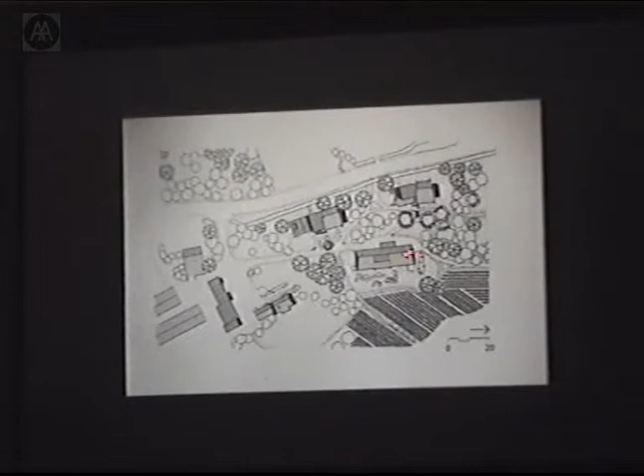This is the site-section relationship. Talavana is this one. There is an agricultural field that we saw an image of earlier that goes towards the Baltic Sea. And as you can see, a very different disposition behind the building in terms of its closeness to this rather steep hillside. This is another dormitory up here in that complex.

Anapestin is its name. And when Asmussen first began designing for this community, they were requested and required by the local commune to put together a master plan. The dilemma was, of course, they didn't know if the college would grow, they didn't know what initiatives would proceed. You might say there wasn't a programmatic direction for it, there was just a dream and a vision, but they had to have a master plan that might cover all possibilities.

And as they were developing the master plan, they made some decisions early on about what were the basic sites. If one was going to build in this landscape, there were some natural sites, some places that should be left alone, some places where building would be appropriate and would harmonize. And so on that basis, they began locating buildings according to the natural disposition of places.

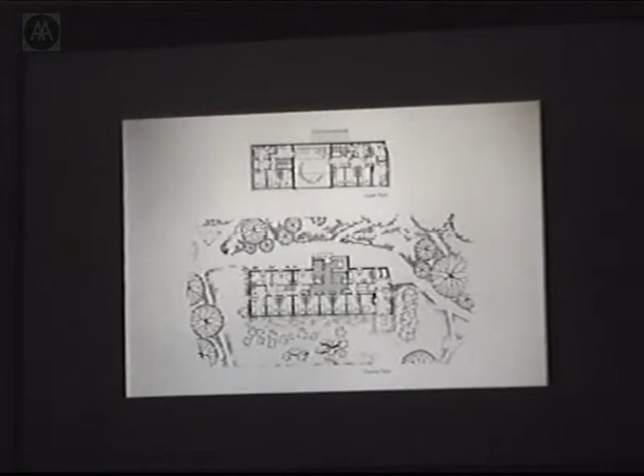I'm going to take a walk now along this path towards this building, towards that inflected edge. You can see again the way in which gardens for use are woven together with pathways for people, characteristic of this community. And we come upon the building.

We see its east-facing facade at an oblique angle, and we come up to this portion of the building. I think it doesn't take a great deal of imagination to see this facade, as indeed it's intended to be by the etymology of the word, as a face with a kind of eye peeking out the roof, which on the other side, where the path doesn't have this relationship, continues straight across and follows a kind of architectonic logic. In this case, there's a window that serves as a kind of eye, a doorway that one might mistake as a mouth, but certainly there's a facial gesture approaching, speaking to the path of approach.

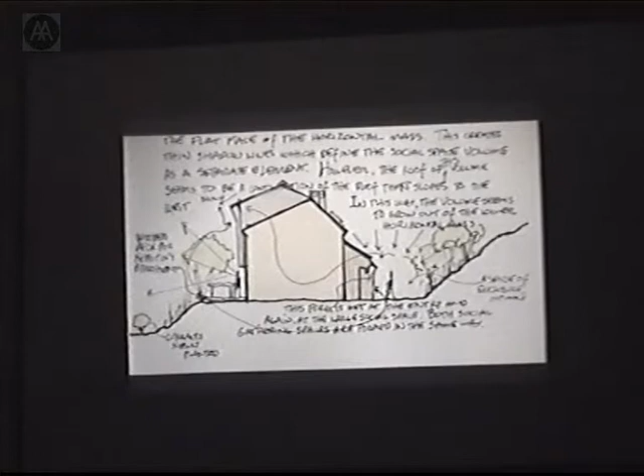And the building inflecting, in other words, the path literally pushes into the mass there and bends around it. This relationship, again, is a fairly typical one. On this side of the building, the west side, the building in its configuration, in its geometry, mirrors the landscape that one finds over here, and itself stitches together, you might say, with that landscape to create a space that is made in part of nature and part of the building.

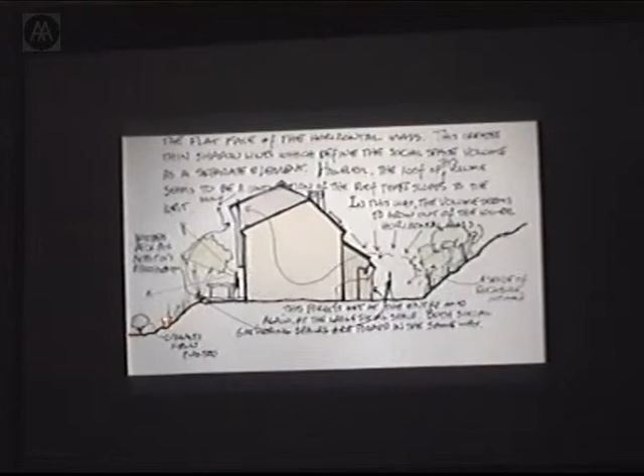On the other side, facing the Baltic, in which there are very orderly agricultural fields, as we saw in an earlier image, the building is more vertical, more regular, perhaps even echoing the furrowed pattern of rows of vegetables.

We can see, again, here is the western portion and the eastern portion. The western portion, the other side, has stucco, and even here the rhythm of regular vertical lines is reinforced by a choice of rough sawn timber.

And then the two elevations drawings that Susanne made for the book, I think, reveal the more random quality, the way in which boulders, rocks, trees, shrubs, etc. on the sloping hillside are clustered, and then the character of this facade, again, echoing the landscape toward which it points.

In other buildings, clearly they speak to a very specific spot in the landscape. This is a building called Almandinen, the public function of which is a music room, the private function of which in this plan, as we see the first level, are housing units. And in this plan one can see the naturally occurring rocks here and here, and the building literally completes that circle of rocks to create a private backyard garden and a front entry space off of the main path.

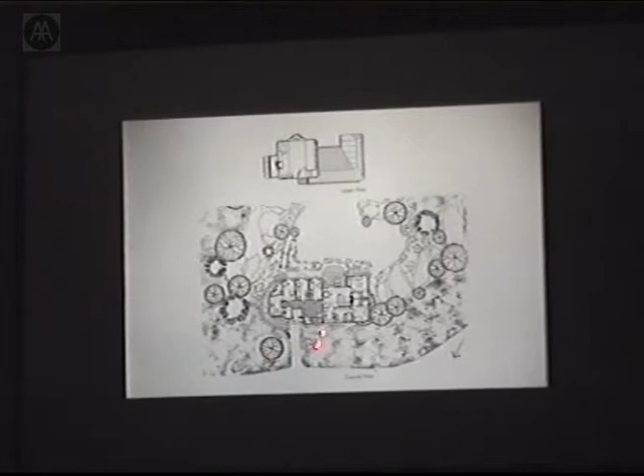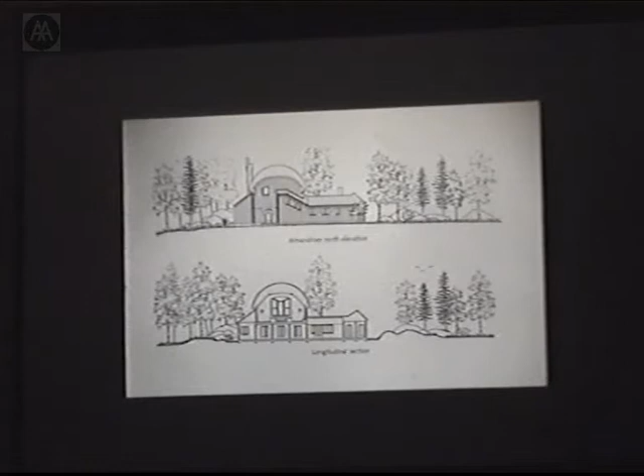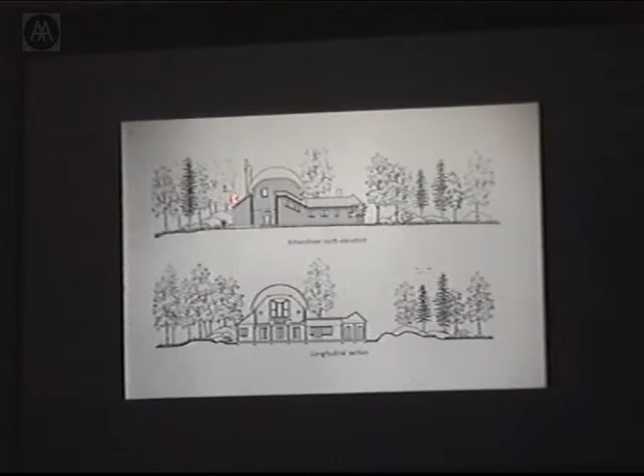There are a lot of things going on with any given building of Asmussen's. We're just focusing on building landscape relationships now, not the other dialectical plays of polygon geometries and circular geometries, curves and straight angles, and other things happening in this. But one, I think, can also see that there is a certain form relationship with that domical, almost head-like element in its placement in that landscape. One senses the building arising out of that conversation in a sympathy with the rocks which it completes.

We see here the site plan of Vidar Clinic, and as was mentioned earlier, the kind of medicine that is practiced here is a little bit different than in a regular hospital. It's clearly anthroposophically oriented and uses many herbs in the treatments, as well as massage and art therapy, eurythmy, music, and so forth.

To me, perhaps this is the most interesting building of them all, maybe the most sophisticated designed by Asmussen in this place, because it exemplifies the overall character that this community had, at least on me, which is that of contemplation, spiritual quality, and again this notion of healing not only at the physical level but also at the spiritual level.

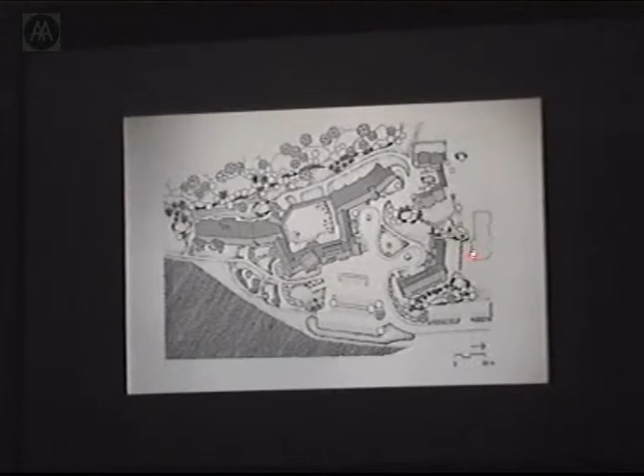The hospital itself is the largest of the 3 buildings, but there is also a housing unit for staff, as well as an outpatient facility and a hotel, a patient hotel, where relatives can stay for a period of time, people who accompany the patients.

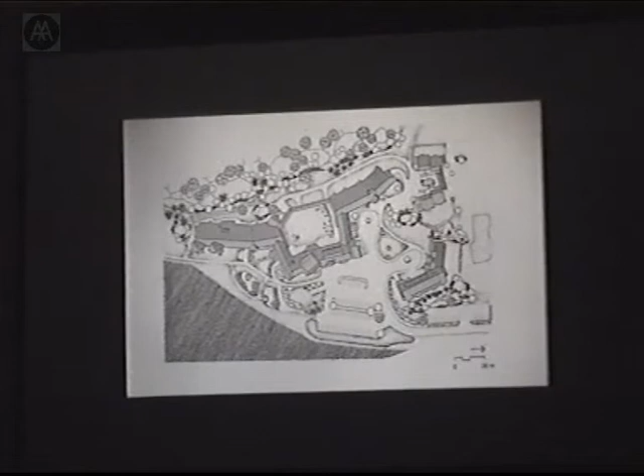Let's see an aerial view of this situation. Again, at the larger level, the hospital relates to the rock outcroppings that are wooded, so it's a kind of wild landscape that grows out of a cultivated landscape surrounding it. Then the housing cluster, as well as the outpatient facility.

What's fascinating here comes back to the issues Gary already talked about: the buildings themselves tend to create space. The hospital itself creates this courtyard space, then the housing is arranged in such a way that it creates a space. Housing and hospital and outpatient facility together create a space.

These spaces are somehow related to naturally occurring situations, such as the big rock outcropping, but also other rocks that sit around the landscape, a major rock outcropping, and then smaller rocks that relate to the buildings, with fences running into them and creating more private spaces.

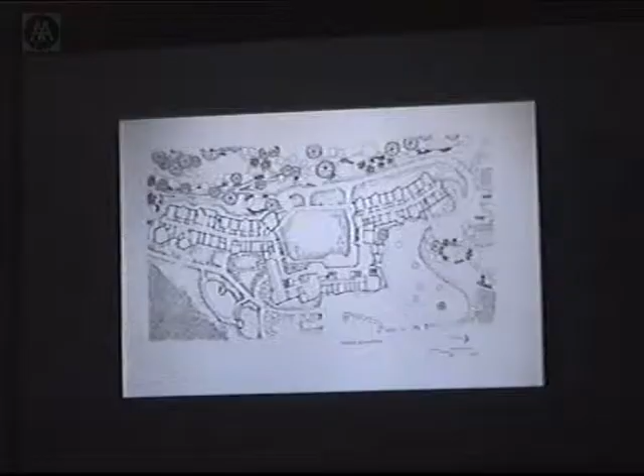We don't really see it here, but we have a better view of how even some individual rocks are responded to by moving the building back. So the rock wasn't taken away, wasn't taken out of the site completely, but is taken advantage of in a way, and it creates a special place.

In contrast to this environment, which gets dark and rather tight — I'll show that in the slides — the other side of the hospital opens to the Baltic, and there are spectacular views across agricultural fields toward the water.

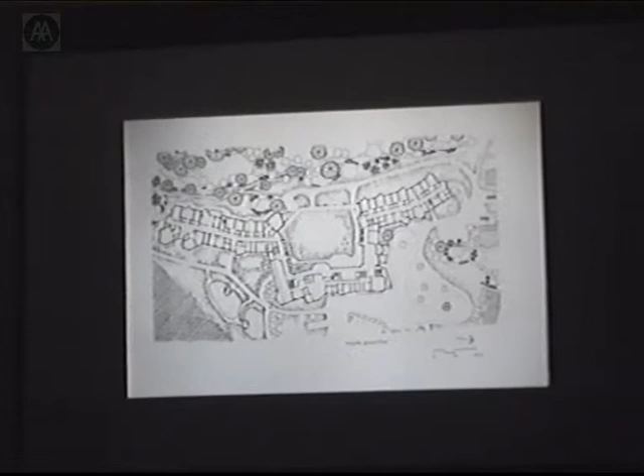Of course, the shape of the roof, the angle and the shape, are directly related to the site, in the sense that this lower angle allows much more sunlight to get back there. The skylight captures the sun that comes from the west and brings it into one of the day rooms, at least on the top floor.

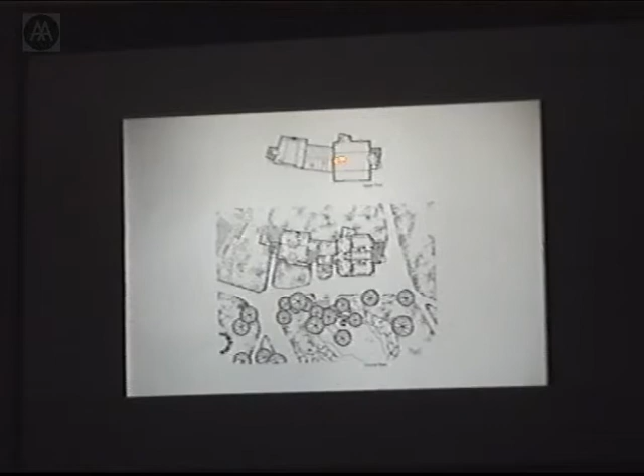Again, this is the eurythmy. I've just mentioned that's the floor plan. And one sees on the outside something of that same form gesture, so one gets a hint of what's going on inside. The large east-facing window clearly tells you where north, south, east, west is located, so each facade in the interior elevation is different, so the dancers can locate themselves.

Give some further examples here from the hospital. Yes, so I will take you back to the hospital to perhaps illustrate in some more detail the effect that the 20 years of programming had on the actual physical structure of the hospital.

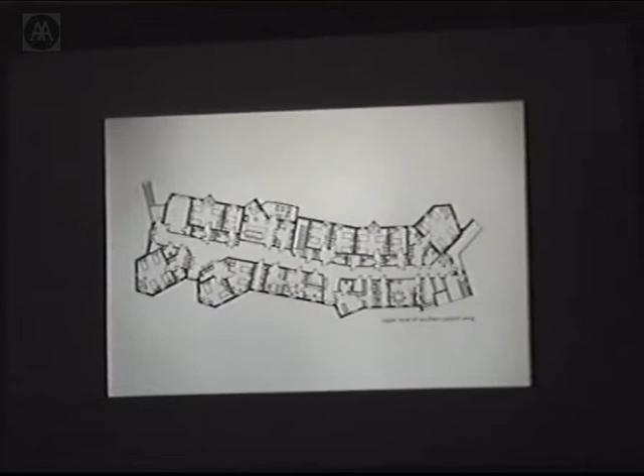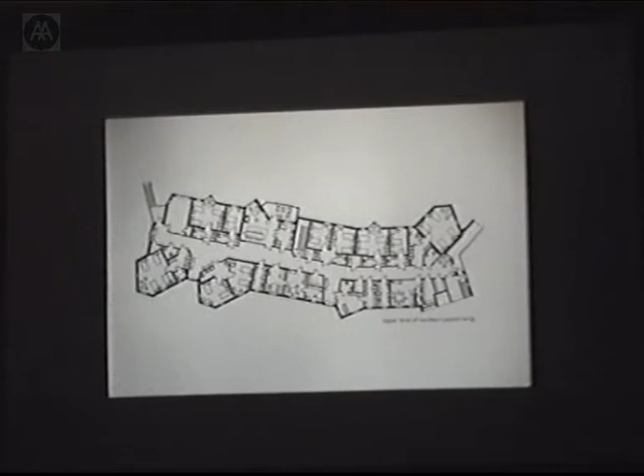And I don't know how familiar some of you are with Steiner's architecture, but certainly the cutting off of angles is seen often as a very typical characteristic. And I know that some architects who've worked in this tradition work with that rather liberally. And what I find fascinating in Asmussen's work is that he does that. He sometimes cuts off angles, but he also uses what we consider maybe more typical geometries. And you see a nice balance between the two. And again, it's not just playing with forms or shapes here, but it rather has medical, or let's say therapeutic reasons.

The rooms that are based on pentagonal geometries tend to be more life-filled, and they often have a higher sense of containment, which comes from the fact that you enter a space and you don't have a wall directly opposite facing you, but rather an angle wider than 90 degrees. So it's much more welcoming and containing, at least potentially, not as confronting.

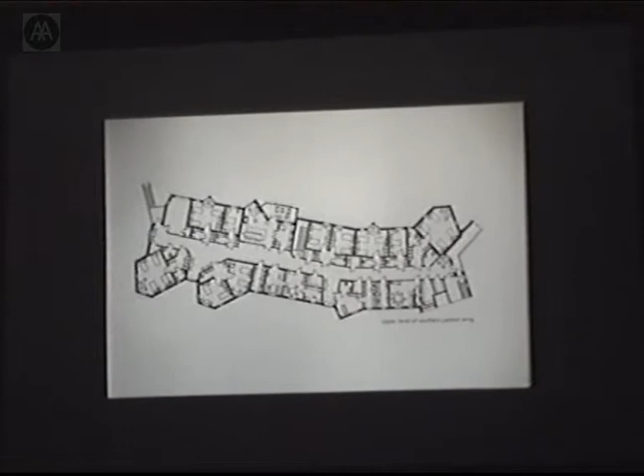On the upper level, rooms are articulated by shaped ceiling planes, which further increases the sense of containment and shelter. Shaped ceilings also provide visual and spatial interest for patients as they lie looking upward from their bed, and there are some patients who are in bed for long periods of time. And Asmussen has been quite aware of that.

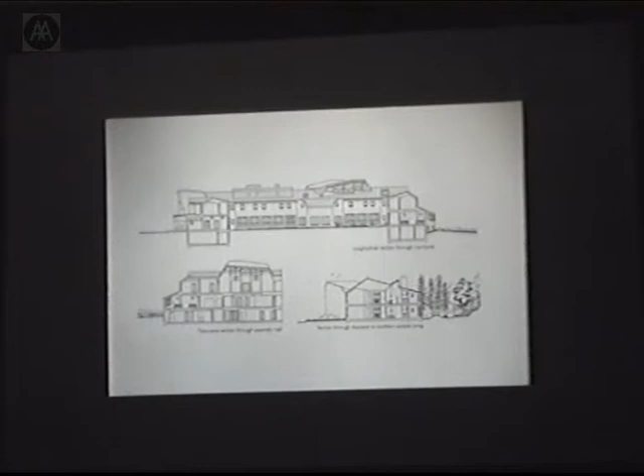Anthroposophic medicine distinguishes between two main types of illnesses: the feverish and inflammatory types, or warm illnesses, such as rheumatoid arthritis, and the degenerative or sclerotic ones, or cold illnesses, such as arteriosclerosis. Depending on the type of illness, doctors often prescribe either warm or cool-colored rooms for their patients.

At the Vidar Clinic, as in all the other buildings, color is never used for merely symbolic or decorative purposes. Rather, it is intended to serve the process of healing by affecting primarily the soul body, soul condition, and to support the function of the spaces in which it is applied.

Occasionally, exterior walls bend outward, creating asymmetrical window bays and alcoves that bring light into the room from two sides. Windows are operable and have deep and shaped reveals. They are designed with great care to allow views from each bed location. The deep sills offer a place for plants and other personal items that the patients might want to bring.

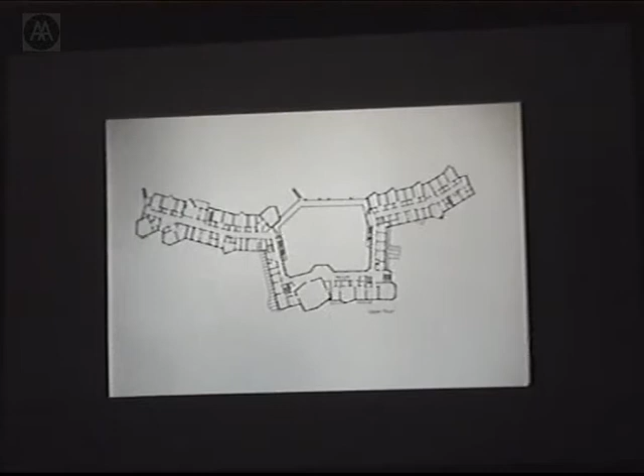And Asmussen has managed to bring light in from the sides in this part, as well as here, where he opens up the corridor into an alcove-like space that allows patients to sit together with family and friends, to make a phone call outside of the path of traffic, and so this particular environment becomes very much more than just a corridor, but it becomes a place to sit, to linger, to meet others, and so forth.

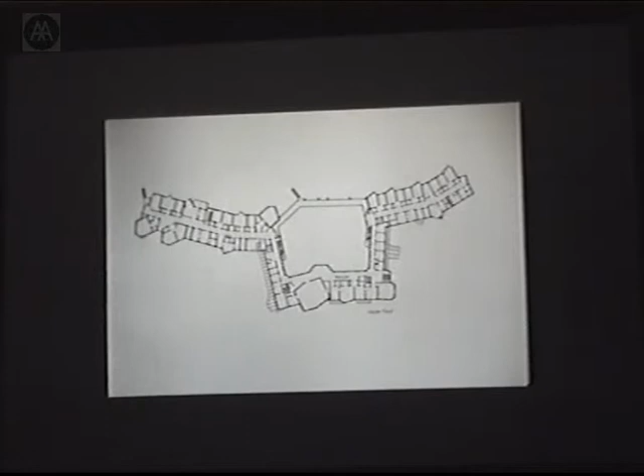In the central core, in opposition also to the corridors in the patient wings, which are double-loaded, in the central core the corridors are single-loaded, with the circulation realm running parallel to the courtyard, so one has always a view out into that space. The upstairs corridor, which you see here, is relatively narrow and has a low-shaped ceiling in some areas, expressing the sense that one is under the roof. So it's clear, again, where one is in relation to the building; it provides orientation.

The gallery completes the corridor on the outside of the building. This two-story space to the west of the courtyard is designed to provide rain and wind-protected sunny outdoor places for patients and others visiting the hospital. Again, ledges and the potential for movable furniture allow each person or group to find the combination of sun, wind, and light that's appropriate for the season and for their condition.

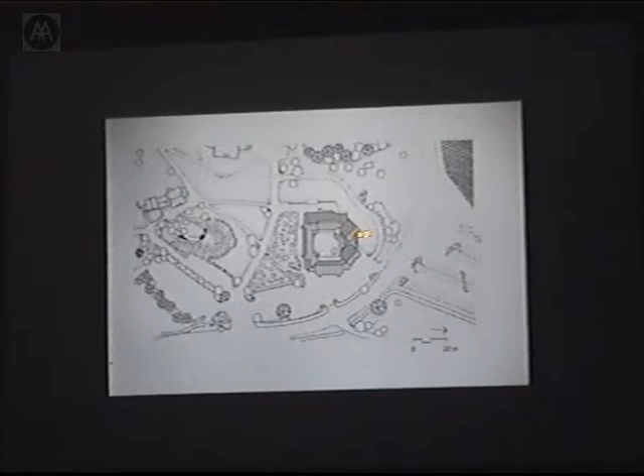I will finish just with a couple more examples and then be open if people have the time for questions and discussion. I'd like to look at another way in which the unity of form and function has guided Asmussen in his design work. This is Robygge, the place with the dining hall, the kitchen, the two eurythmy practice rooms, and an interior courtyard.

This is the plan of that building. One enters through the airlock here and comes into this space, the dining down this way, the administrative offices down this way, the store is here, kitchen facilities and dishwashing, and then an apartment for the cook.

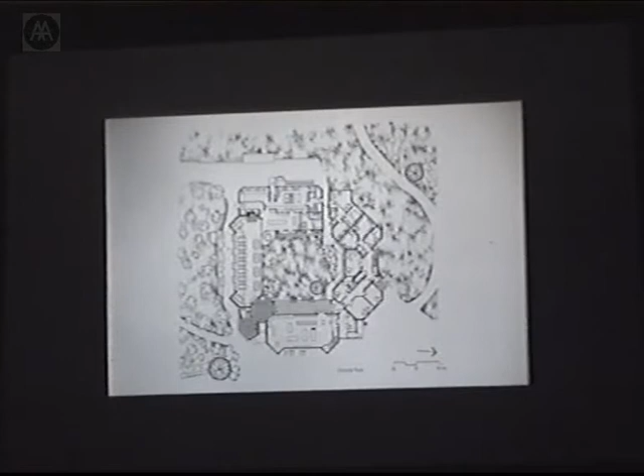So if you lose your job there, I guess you lose your house too. Gives you an incentive to cook in a good way.

And this building, again, through its form, geometries, proportions, etc., is speaking at a number of different levels. What I'd like to call attention to, however, is just the most simple level of the physical and psychological functions and social functions. This is the south edge. This is the dining hall with that artistically expressive fireplace element here, both the chimney and the interior expressing these qualities of its functions. And you'll notice that the center of that space is shifted to the south so that the low winter sun angles can penetrate.

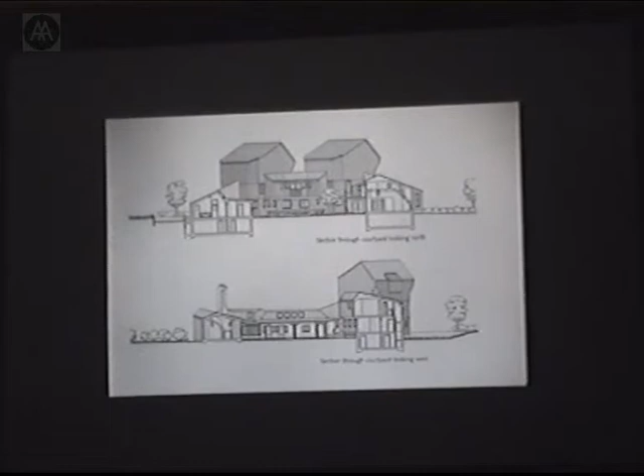It's the lowest segment of the building to allow the sun into that wind-protected interior courtyard, which is used as much as possible throughout the year. To the north, we see the high-volume eurythmy practice room set on top of other more functional administrative spaces. So the overall composition of the building reflects the play of sun, wind, and light, and climate control, the building's function for providing habitable outdoor space.

You can get a sense of that sheltering quality of the building and the way in which this lowest portion is to the south, and also somewhat low to the west and to the east, so light can get in.

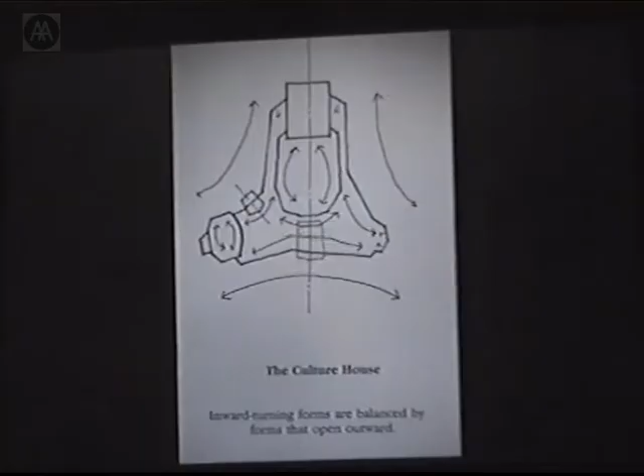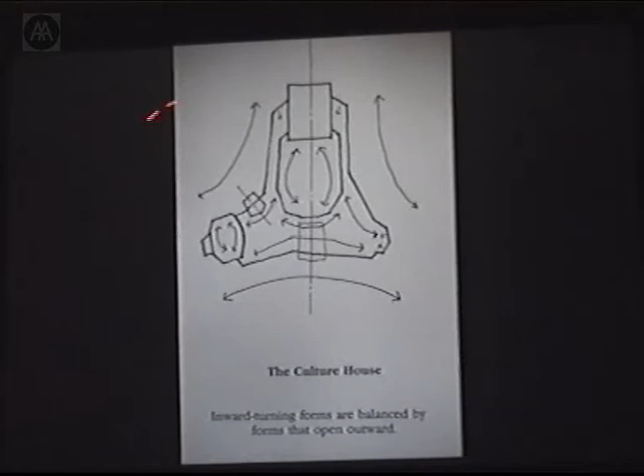The building is composed, one of the principles that I talk about in the book is polarity, and we can see that very much here also, that we have this convex figural element of the auditorium, and then these concave forms that are outward reaching, embracing, and in the spirit of the harmony of site and building are actually shaping and completing spaces in relationship to rock outcroppings and to the rest of the circle of the buildings on the south side around the orchard meadow. And this is embracing the agricultural field, which we saw across the long distance there.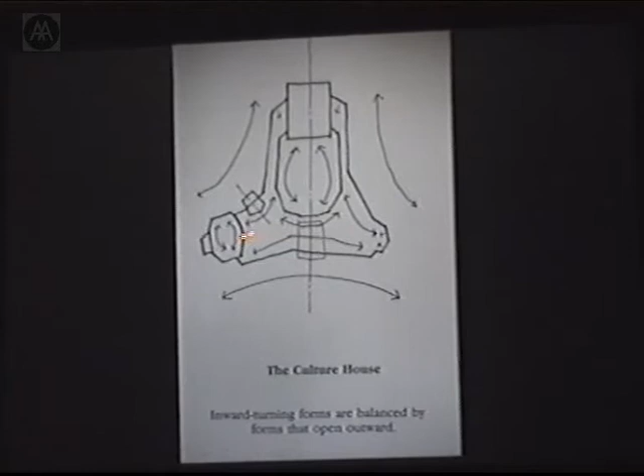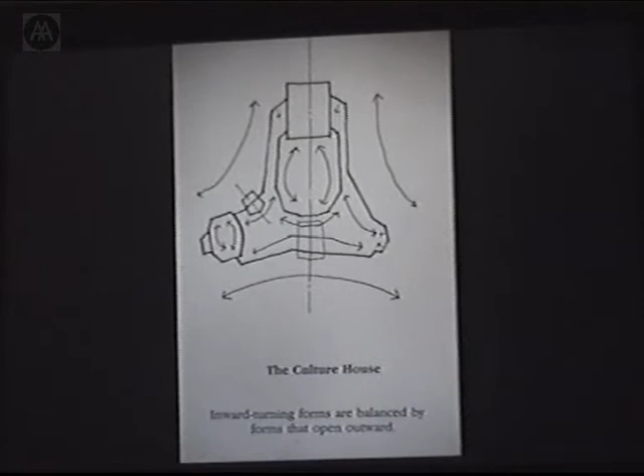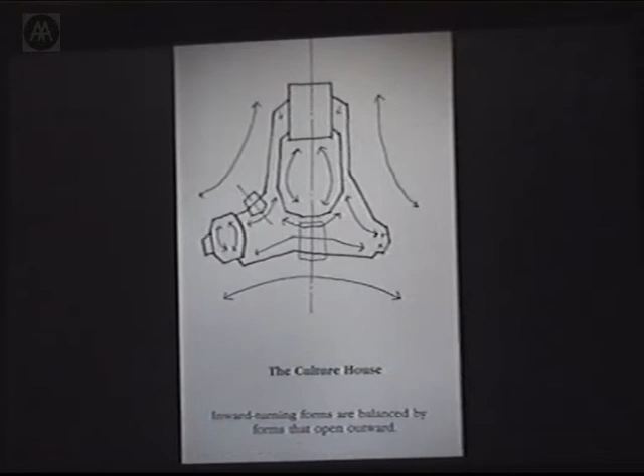So the play of convex and concave forms, and what I'll be looking at is the contrast in the final images between the qualities of the foyer and the qualities of the hall, between spaces designed for movement, activity, impromptu gatherings, social occasions, etc., seen and being seen from above and below and all around, versus the more concentrated and focused activity of the auditorium itself, in which people gather to relate to performances of eurythmy, to lectures, to dramatic performances given at the stage. So we'll see how Asmussen uses form, space, and color to communicate these different inner qualities and functions.

That must be Scotty. Can beam me up in a moment, if I don't finish shortly. So I will finish shortly.